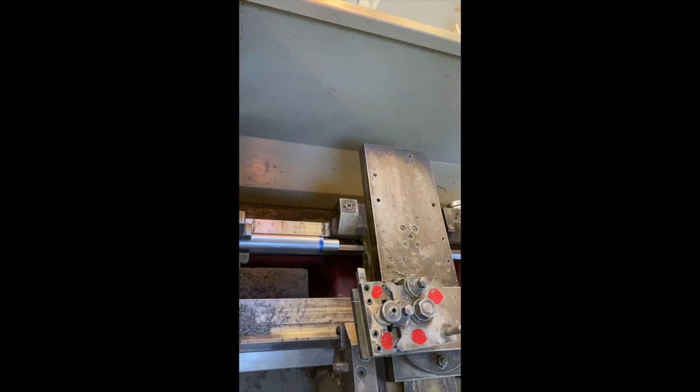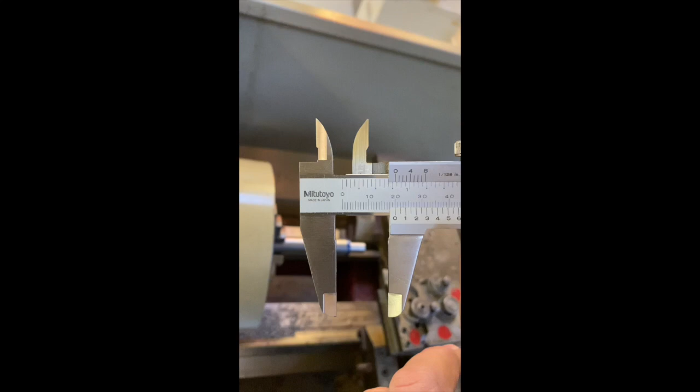Okay, so now we're going to do some parallel turning. That's going to reduce the width of this bar to 18 millimeters. This at the moment is reading at just under 20, see that, just not quite on 20 there. So we need to take that down to 18.

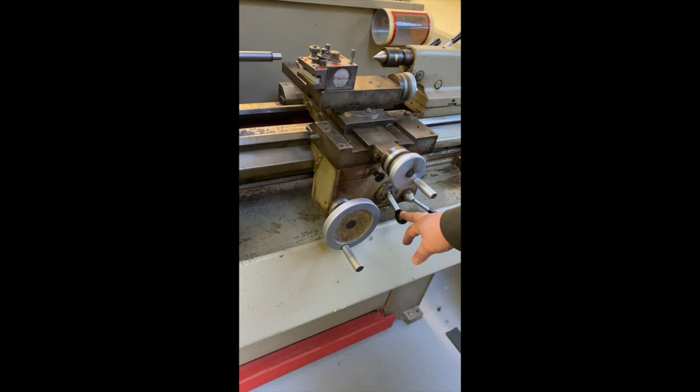We're going to use automatic feed for that. Automatic feed control is here. Okay, so we start the machine, green button. We'll bring this into alignment.

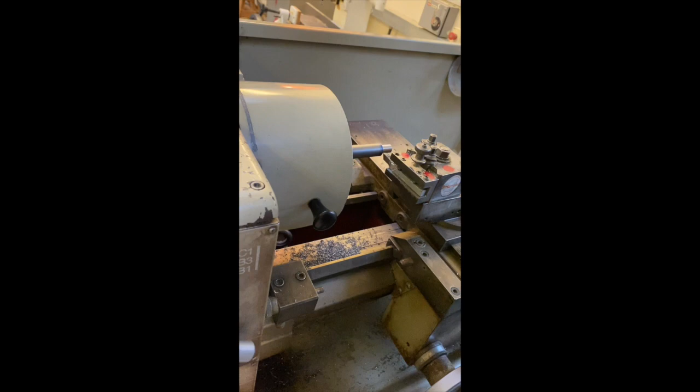But so that we're not taking off too much material, we're going to engage the automatic feed. That will start to drive that tool into the work, and it will start cutting just about now, I would hope.

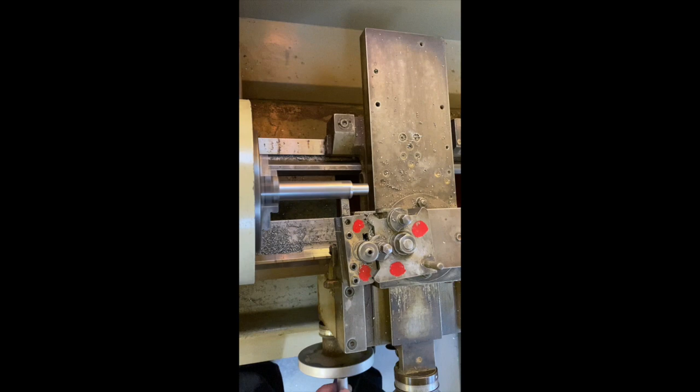But that's not really taking a lot off at all, so let's not worry. We can go a little bit further than that. So we'll take this to 1 graduation, so from 2.4 to 2.6.

It's cutting, but it's very slight. But that's no problem, we can run with that. We'll cut to about here. And then we'll wind it back and we'll run it through again.

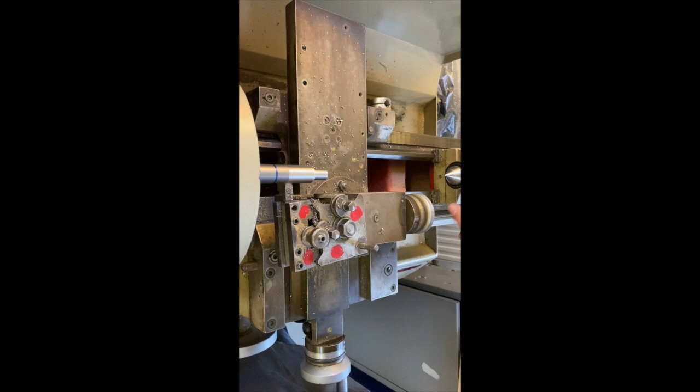It would be ideal if we could support this end with the live centre, but we can't physically get the centre on it. So we'll have to do this parallel turning in 2 halves.

But because we've got a taper in between the shoulder and the handle grips, I just push this button down, or this lever, push this down, that stops the machine. Now I can wind this handle to bring the tool back. I'm going to step this from 2.6 to 2.8, engage the drive.

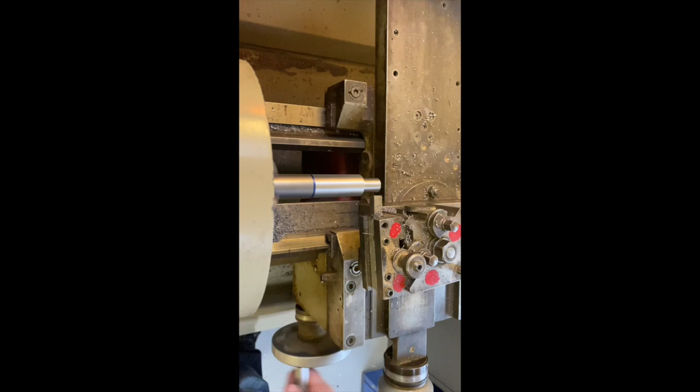And then we'll just have a look and see. I've set this again to 18 millimeters. Hopefully you can see that okay. We'll try that on there. So it's still slightly big, which is what you'd hope.

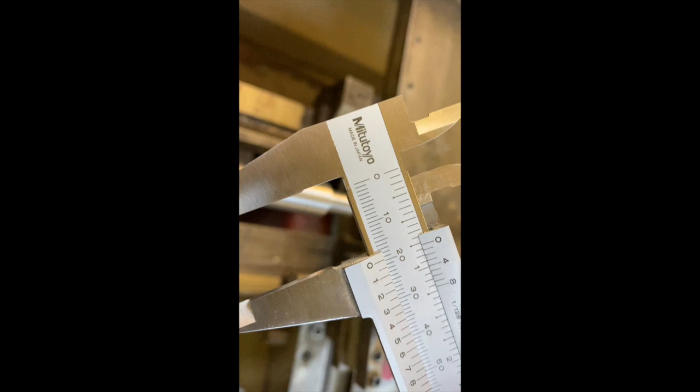So that is 19.6, see how the 6 is real close. So we've taken 0.5 millimeter off.

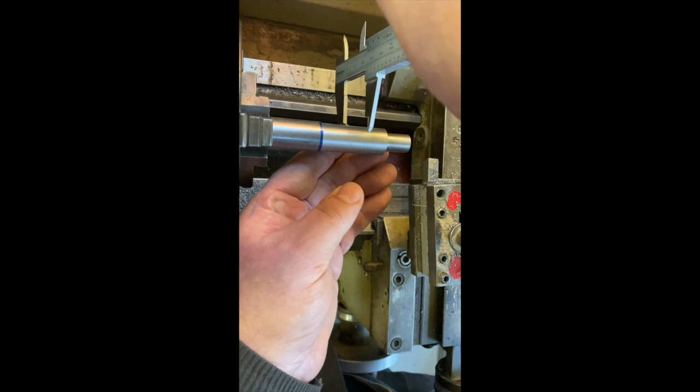Okay, let's just have another quick check and see where we're at. Don't think we're quite there yet, but we'll be close. So 18.8 on that one at the moment, so we need to take 0.8 off.

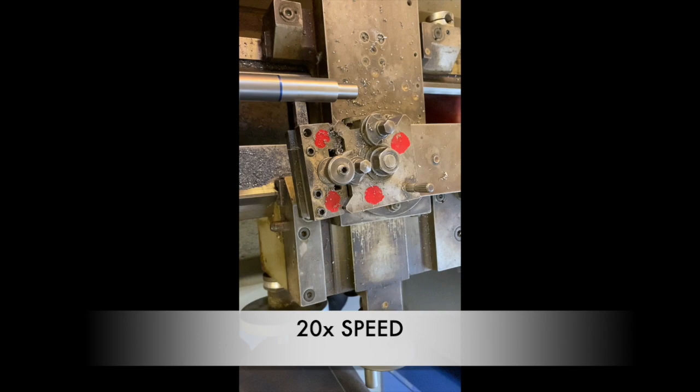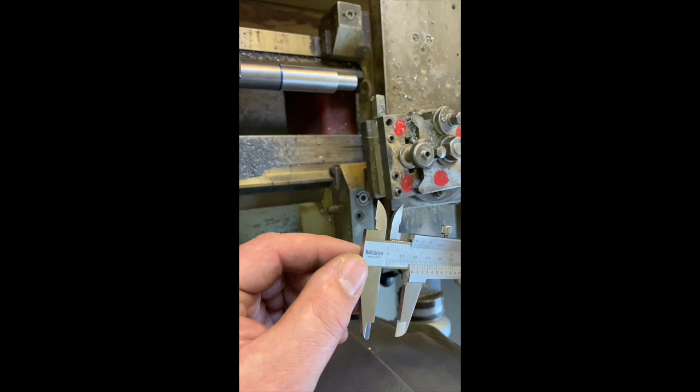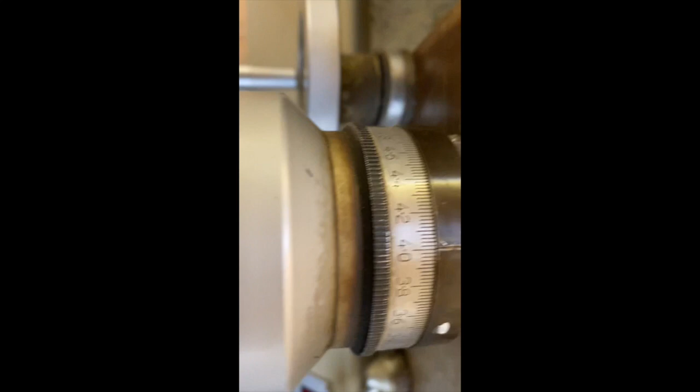Let's see what effect that had. So that's now reading 18.6. And if I can show you here on this scale, the scale is, you can see in 0.2 of a millimeter here. So if we take it to here to 4.2, that should reduce that from 18.6 to 18.4.

Obviously we've done quite a lot of cutting now. We don't want to let that tool grind into that blue line. We will be cutting it from the other side. So if there was ever a time to stop this machine slightly earlier than that blue line, it's about now really, and then you don't take anything extra off that part.

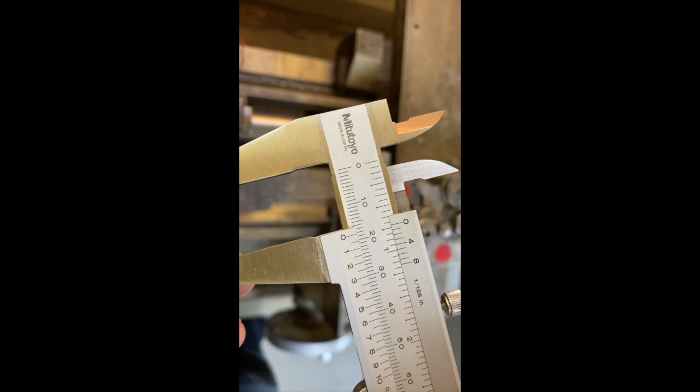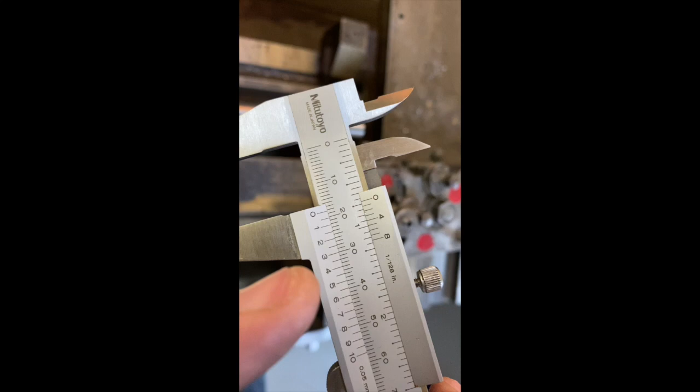Now this is of course where it doesn't work. So this is what I said should be 18.4. Let's have a look and see what we've got. So 18... I think that pretty much is right. 18.4, you can see the way the 4 lines up really well with the scale above, and that's what we're looking for.

So that's 18.4. So we've got 2 more passes to get it to 18.2 and then to get it to 18, and that'll be 18 then dead on that. Cool.

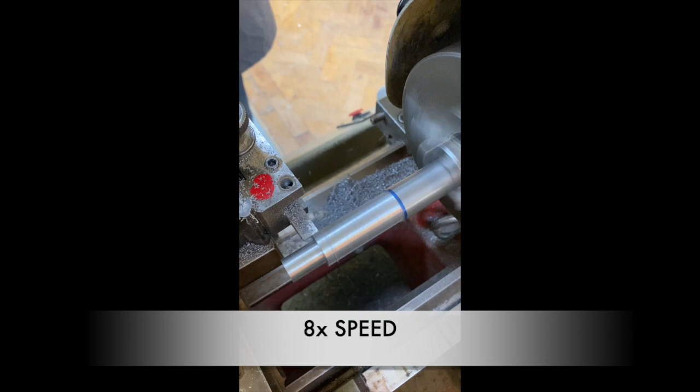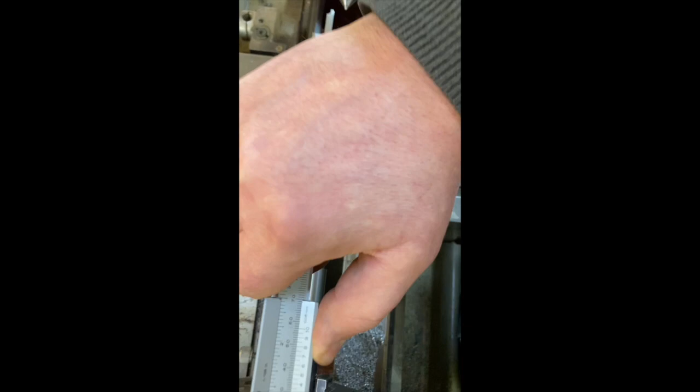Okay, I slowed the speed down slightly on that last cut, so the finish is slightly better than we were getting up to that point. And if I just show you that, there you are. Hopefully you can see that's 18mm there, finished.

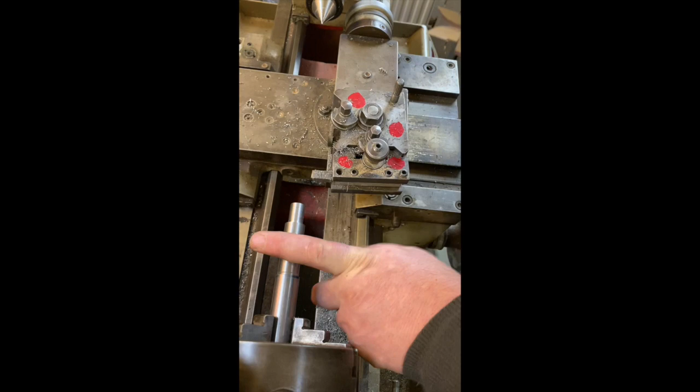So what we're going to do now is turn this round, and then we can machine it from the other side to get the whole bar 18mm diameter. But you've already seen how to do this part, it's exactly the same process as that. What I'll do instead is cut the taper on this, which is the other process that you need.